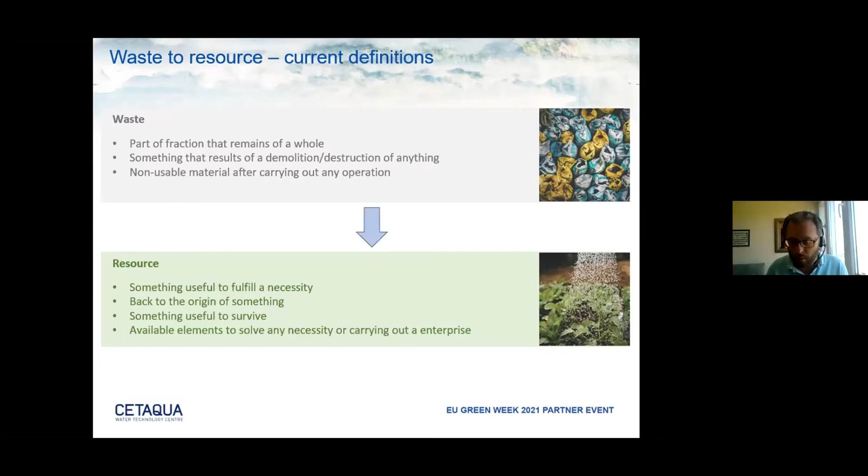As you know, waste is a fraction of a whole or a material that is no longer used after some kind of activity has been performed. This should be part of the past, so we have to make our small contribution in order to make this circular and in order to come up with resources. That is something that is useful in order to meet a need or a good or service that is required in order to carry out something in particular or make something become real. So we want to do this. We want to turn waste into resources for different purposes.

At Cetaqua, coming from Agbar, we were historically tied to the comprehensive cycle of water treatment. In Santiago de Compostela, the Agbar Center treats water from a comprehensive perspective, so that is our core business. These are the wastewater treatment plants. Little by little, we are moving towards the industrial sector, also placing an emphasis on wastewater facilities.

We are also trying to work on reclaiming water, stepping outside of the biological systems that normally prevail in water treatment and cleaning. So we do our best in order to use reclaimed water, that is to say water coming from households is cleaned, and then additional properties are put in order to use them for garden watering, for irrigation purposes, and also for street cleaning.

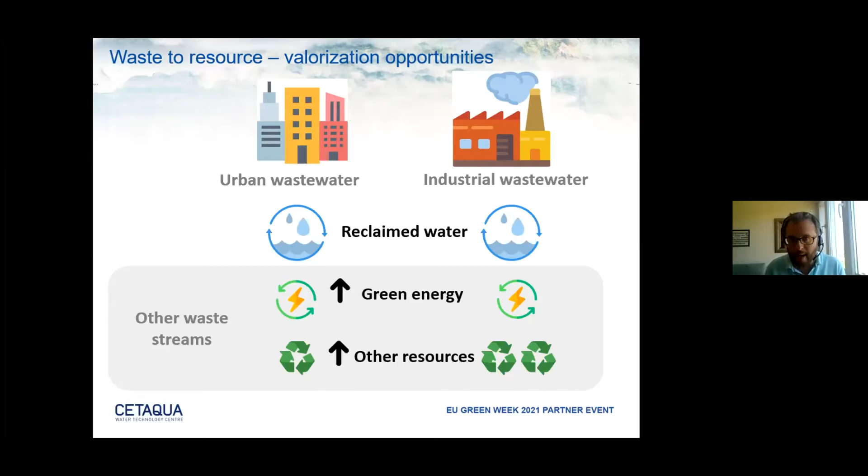We also do our best so that all the water coming from households can be caught in order to produce green energy by running some biological processes. So carbon can be turned into an energy generating gas. We also try to catch resources from solid urban waste. Martín from Códax before spoke about this already.

In this case, all the waste coming from these wastewater plants, that is to say the sludge, is subjected to an anaerobic process in order to obtain biogas, which is a source of energy that can be used either to produce electricity in the wastewater plant itself, or else it can be subjected to other processes in order to use it for other purposes.

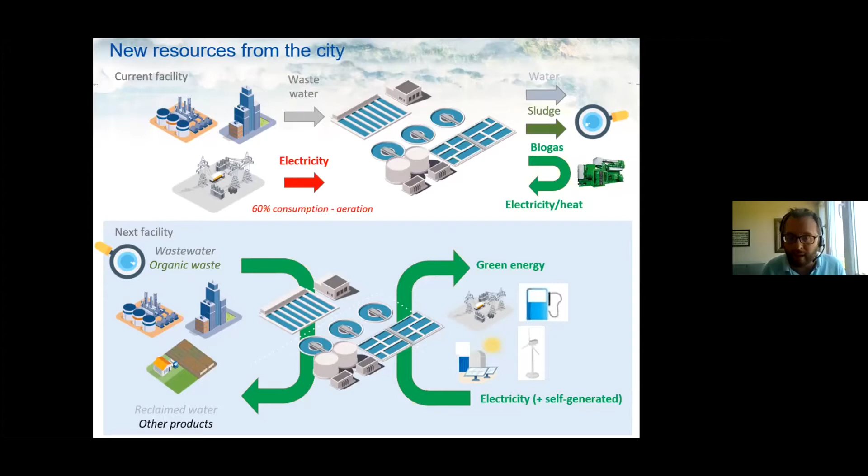In addition to carbon, we will also take into account nutrients that are found in wastewater. We will explore new ways of reclaiming phosphorus, for example, in order to produce fertilizers that require low application. That way we can use these fertilizers little by little in such a way that soil can better absorb all the fertilizer load without contaminating water layers, as it happens today with the application of traditional fertilizers.

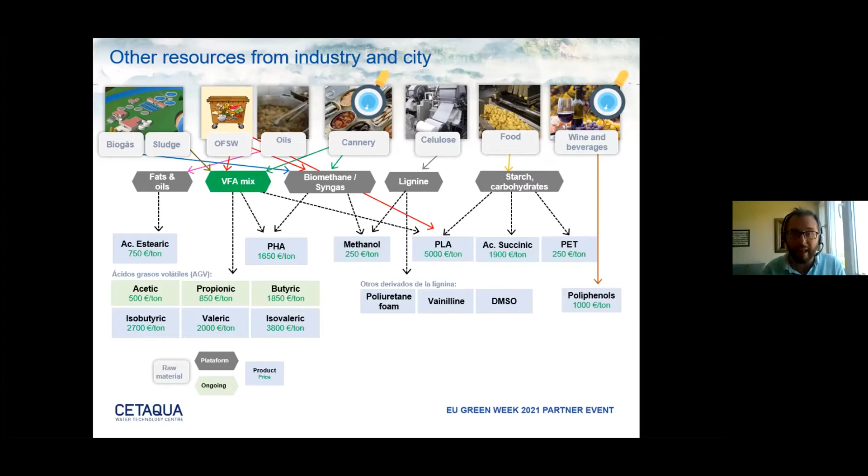As you can see here, there's a lot of theory behind reclaiming resources. There's a lot of scientific literature available on the matter. This is something that you can find in many databases. These are the different limits showing how far we can go. We know that we are not going to live forever, and therefore we need to make our small contribution by putting in place different initiatives in order to reclaim resources that today are considered to be waste. We can therefore keep them in the value chain, therefore reducing the exploitation of natural resources.

For instance, in the case of grapes, as we heard before, there are some compounds called polyphenols. The CIGAT Biofactory project is working on polyphenols by applying a separation physical process. We want to run an ultrasound process in order to obtain polyphenols that can be applied in different industries. For example, polyphenols can be used as a raw material in other industries, such as in the food industry, in the cosmetics sector, or in food and beverages at large.

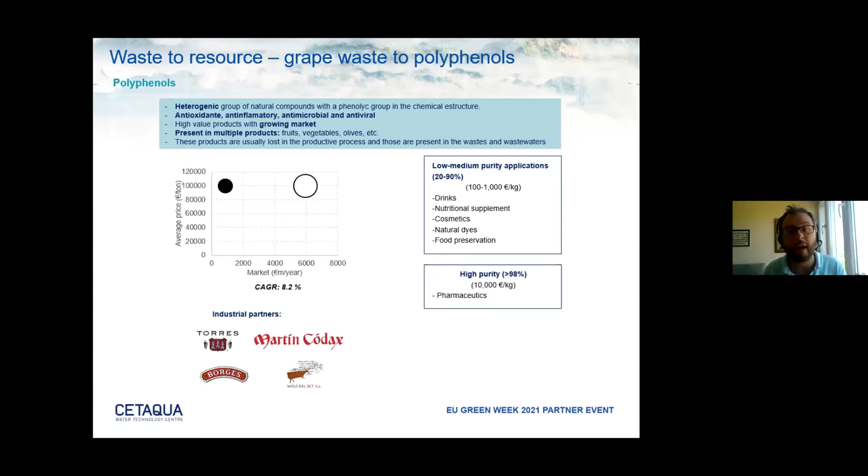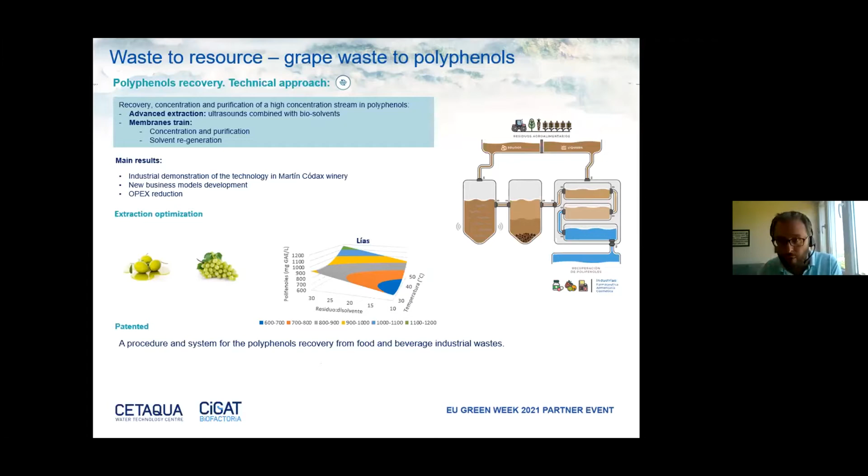At a low quality level, in the case of high quality polyphenols that could be used for pharmaceutical purposes, but that will take longer. This is a process where the viticulture waste is subjected to this process, to some ultrasound process. We use a number of membranes in order to obtain different degrees of purity of polyphenols. We can then use these resources according to the end users identified for this purpose.

Within the framework of the Conserval and the CIGAT Biofactory project, we will be able to obtain what we call volatile fatty acids, or VFAs. For example, we will be able to obtain acetic, propionic, and butyric compounds that today are found in the petroleum industry, even though they are similar to petroleum chemistry. We want them to come from waste sources after an anaerobic fermentation process. We want to obtain these acetic, propionic, and butyric compounds by using biotechniques.

For example, in the case of the canning and the dairy sectors, we can apply a fermentation process followed by a separation process that we are now working on. We can also use biomembranes in order to obtain purity levels that can be as similar as possible to these compounds that today are found in the petroleum industry. The aim, therefore, is to have VFAs that can be marketed in other industries, for example, to produce bioplastics, polymers, and also oils and fuels.

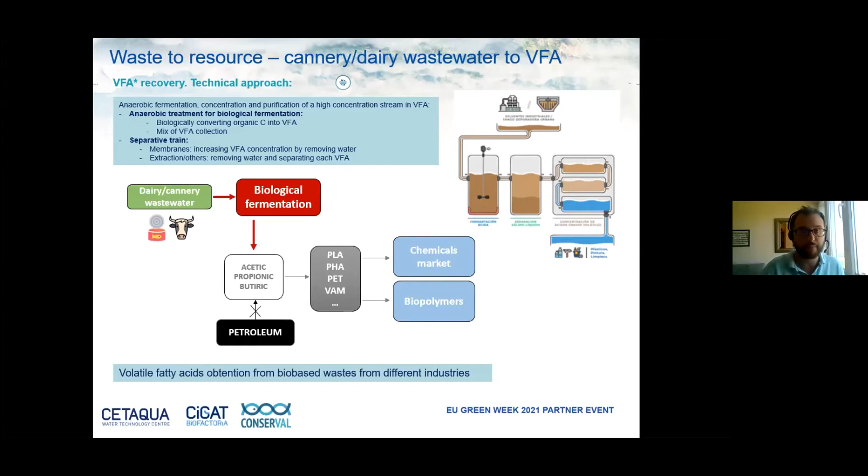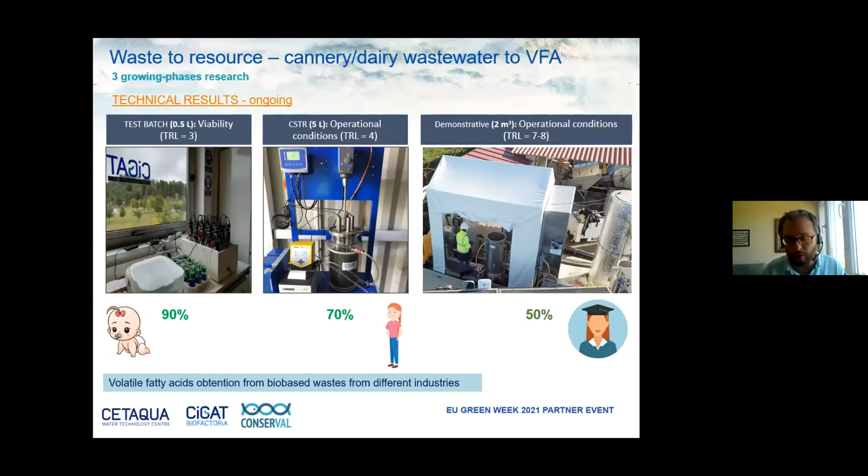What are we doing at present? We are still at an incipient stage. We are taking some baby steps. In the case of the canning and the dairy sector, we can turn VFAs up to 90% with different degrees of purity in each case. Now, if we move forward at a later stage, we are doing this at 70%, and at pilot scale, we are transforming carbon at a rate of 50%, and we believe that this rate could be further increased. So we will be able to twofold the amount of carbon in the form of VFAs.

Cetaqua is well acquainted with water-related processes because we have more than 150 years of experience in this area. We know that sludge contains many resources that are not being exploited. So we believe that right now this is not being managed, or it's actually being managed as waste, but VFAs are not being obtained. Therefore, we want to start using industrial wastewater, but using sludge coming from wastewater plants. We want to therefore create acetic, propionic, and butyric compounds. And we want to take one step further if possible.

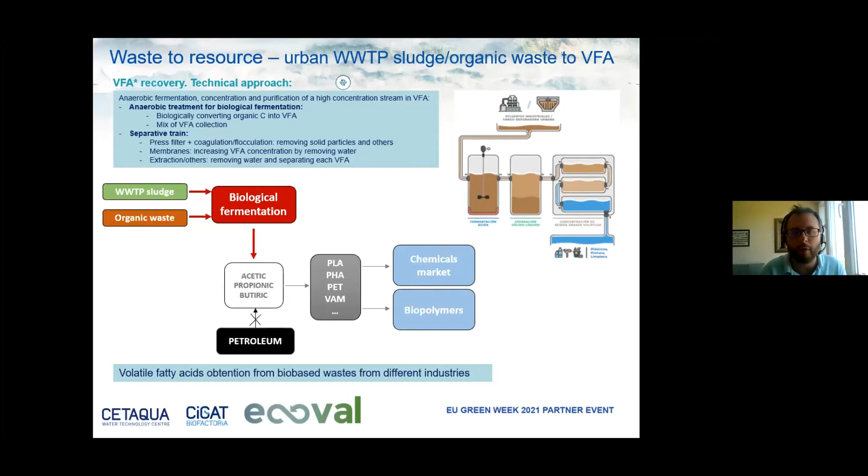In addition to sludge, we are also trying to aim at organic fraction solid waste processing. In addition to sludge, we would also like to introduce OFSW in order to increase the volume of VFAs. And that way, other industries will be able to obtain bioplastics, oils, and other consumer goods by using these resources.

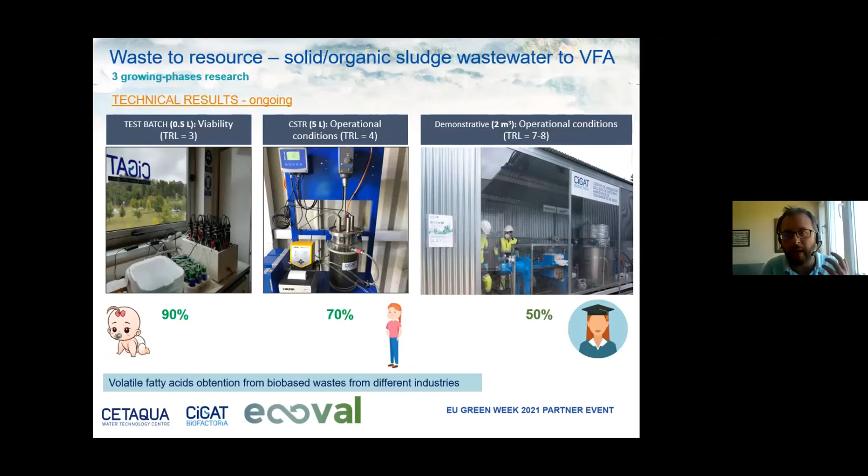We are also working on different experiments at a larger scale. We have also run some surveys and we have obtained satisfactory results. We intend to increase, therefore, the resulting volume of VFAs.

In closing, just like some of my colleagues said before, all this experimental work is in line with the EU strategies, Madrid strategies, and the government of Galicia's strategy. Everything we are doing is intended to foster the circular economy, putting in place all the actions that are being promoted by Brussels, Madrid, and Santiago, always in accordance with the European Green Deal,

and of course with an outlook on attaining the UN SDGs. And that's all. Thank you very much for your attention.

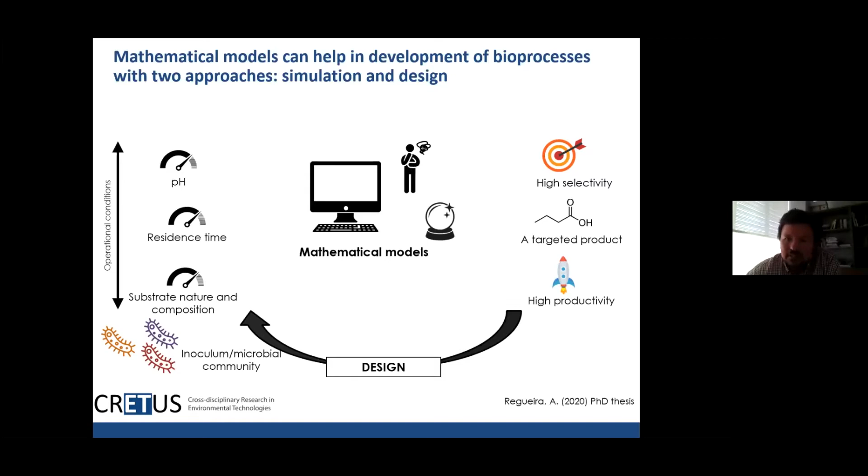Let's suppose that I want a high selectivity of a certain compound, for example, of butyric acid in a particular product. What kind of waste can I use to get there? Under which conditions should I work? I know that this may sound kind of rocket science, so let me try to throw some light by giving you a concrete example.

These are the VFA biofactories that Álvaro also mentioned during his presentation. This biorefinery or factory for VFAs is an interesting concept because it's highly versatile. It can be used with different kinds of waste with little separation. It's highly flexible. And this flexibility eventually leads to obtaining VFAs, for example, acetic acid, propionic, butyric acid, among others.

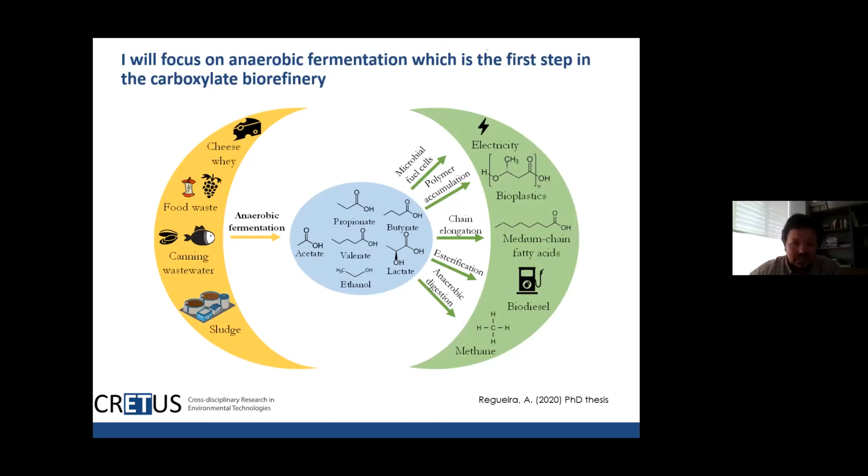And the second step is to turn those intermediate products, called platform products, into a whole range of products that could be very useful. All these are chemical products that can be turned into fuel generating products, for example. They can be used to produce bioplastics, electricity, among others.

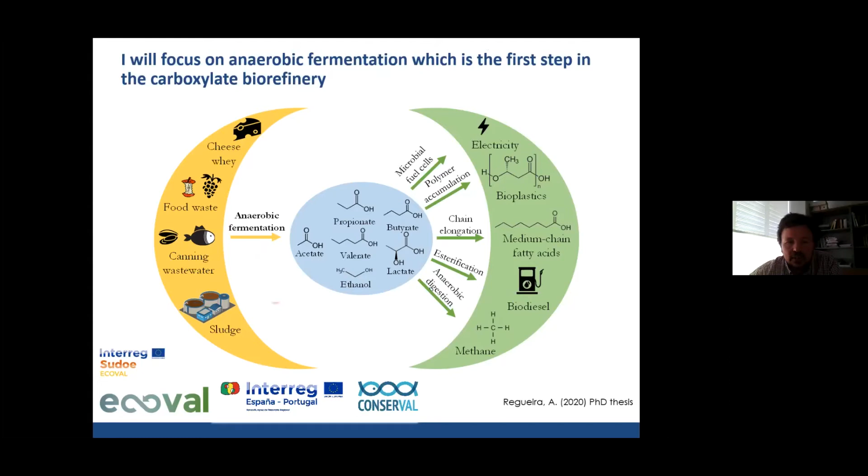At the University of Santiago de Compostela, in our center, we have been working for many years in designing processes for bioenergy. We are now working with Conserval and Ecoval. Álvaro also mentioned these projects before. So the first step in carboxylate refineries has to do with anaerobic fermentation in order to transform organic matter into these end products. So how can we apply mathematical models in order to obtain VFAs?

The first step is about anaerobic fermentation that leads to VFAs, but sometimes it's very difficult to predict. It's always going to be a mixture, and it's difficult to see which compounds will prevail, if any. Besides, these prevailing compounds may vary to a great extent and not in an obvious manner according to the substrate and the operating conditions.

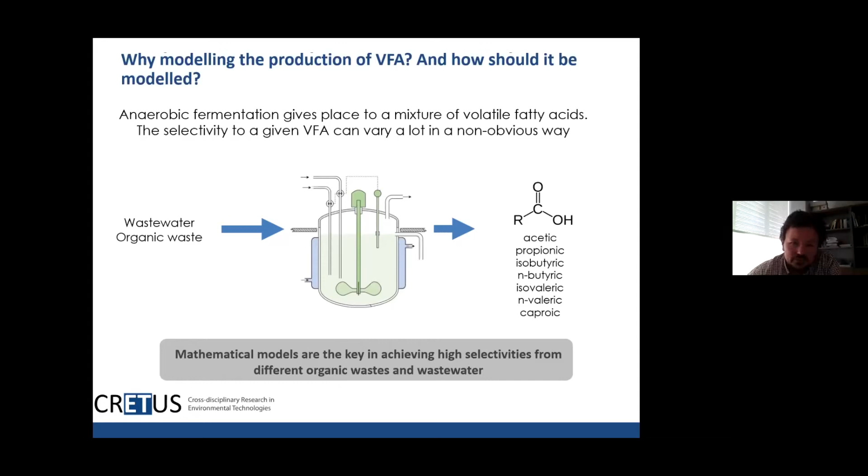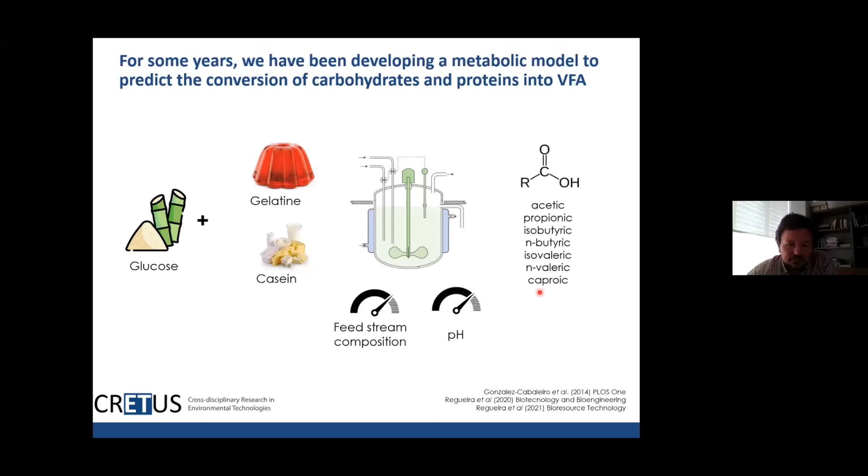We have worked to show that mathematical models can be key in predicting the products that could eventually be obtained with high selectivities in order to obtain products from recovered waste. For many years, we have been developing mathematical models at metabolic level in order to turn mainly carbohydrates or waste containing high levels of carbohydrates and proteins into VFAs. So this kind of waste eventually results in VFAs. These are the intermediate VFAs that we are interested in.

So what are these mathematical models like? These models are concerned with a number of biological processes performed by certain microorganisms. So they describe a number of metabolic transformations inside the cells of these microorganisms. So this shows how the different substrates get into the cell.

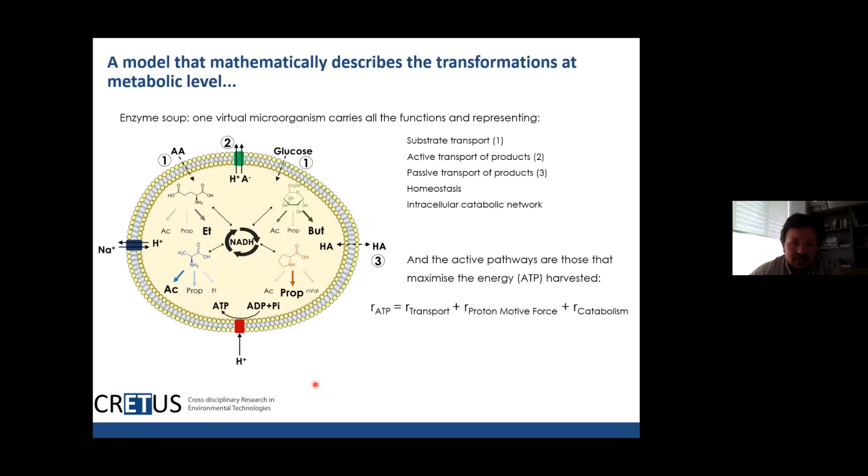So how can we predict the compounds that will prevail in these transformations? Well, we can apply a number of biological fundamentals. We know, for example, that in fermentation processes, these products are the ones that will allow cells to grow more or obtain the greatest amount of energy possible. As I said before, this can be depicted mathematically, and eventually it enables us to predict the main fermentation products.

This chart, for example, shows on the horizontal axis at the bottom the gelatin concentration in the feed. Here we had two residual flows, one that is rich in proteins and another one rich in carbohydrates. 100% of the flow here would be rich in carbohydrates and the other one rich in proteins. If we change the proportion of both flows or streams and according to the pH under which fermentation is performed, we can obtain different

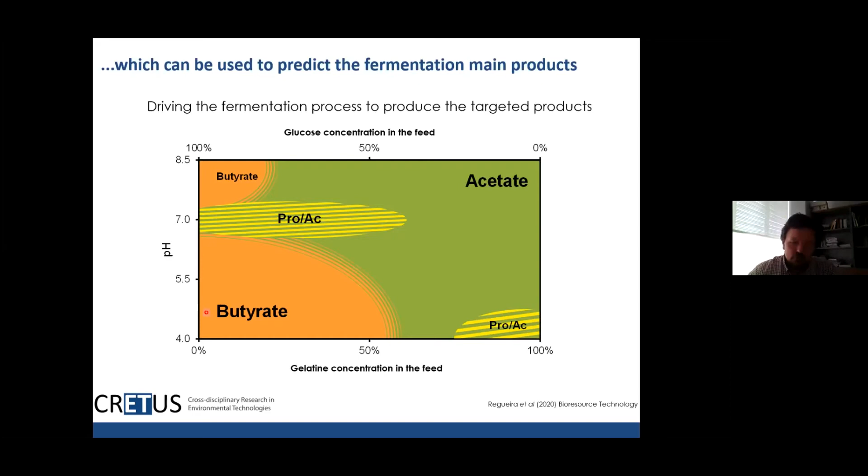areas with either one VFA prevailing or another. We can have butyric acid, for example, or else with a moderate or high pH, we can obtain other results. If, for example, we want more acetic acids, we can start using other streams or flows using high levels of protein. So, of course, this can also be translated into more quantitative calculations.

Within the framework of the Conserval project, we want to predict not only how VFAs are produced, but also how salinity in the wastewater of canning facilities will affect the production of VFAs. Therefore, we need to expand our mathematical models, taking into account the metabolic transformation carried out by microorganisms in their cells in order to face this salinity or salt accumulation that sometimes can be tough on microorganisms.

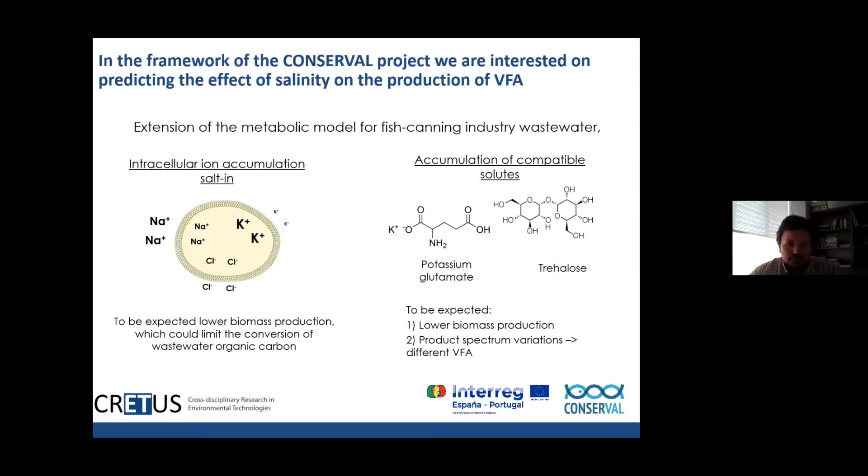Here we have represented different behaviors, mathematically speaking. For example, there is an adaptation strategy that is called salt-in. This means introducing other types of salts, like for example potassium ions to compensate the sodium ions, or else the accumulation of compatible solutes to allow cells to withstand salinity better.

How can we tell, or how do we identify the strategy being followed by each cell? Here we're trying to develop bioprocesses by applying mathematical models. So we will have to run experiments at the lab in order to validate all these models.

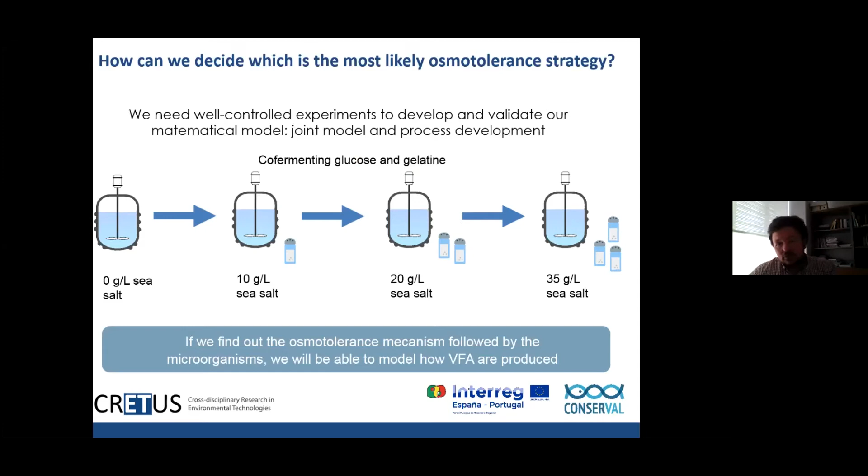We have some reactors used for fermentation, for example, for carbohydrates and proteins with different salt concentration levels, and that enable us under controlled conditions to learn which mechanisms are applied by microorganisms to see how they withstand salinity and how this affects the products that we are seeking to obtain. So the salt-in strategy, for example, will not alter the VFAs that might result. That's quite interesting. However, the number may be lower at the end, or they may be produced more slowly.

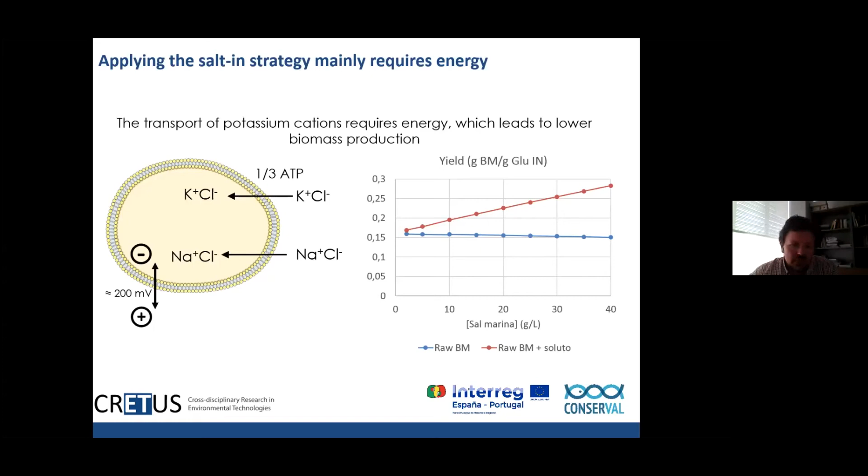We also know that producing a de novo compatible solute, these may be interesting compounds. For example, there are some products that can be used for cosmetic purposes. This, however, requires a high level of energy consumption by cells, and therefore this may lead to a reduced amount of VFAs.

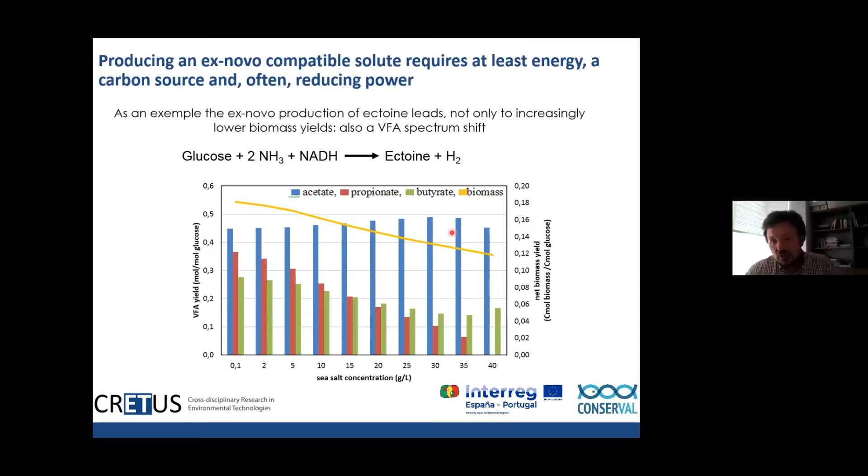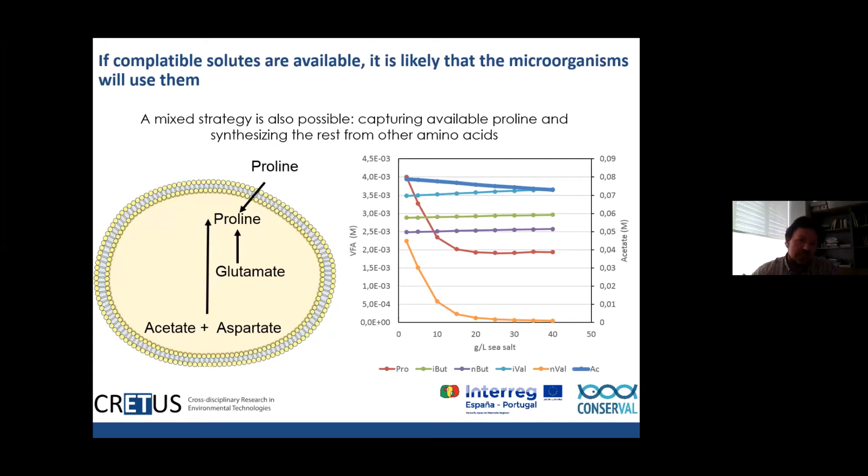Therefore, if the cell is producing this compatible solute, this happens with glucose, for example, we will go from a fermentation of this kind, that is acetate, propionate, and butyrate, to another one that will be more acetic. So we can have intermediate situations as well. We are using compatible solutes that can also be substrates, so the change of spectrum here will be different.

By bringing all the experiments together and running our models, we can do some predictions as to what is going to happen. And how do we use this to develop bioprocesses? As I mentioned before, we have simulation. We can screen the different wastes and the simulation conditions. We can try out different wastewater material from treatment plants, or, for example, organic matter from industrial facilities, or solid waste.

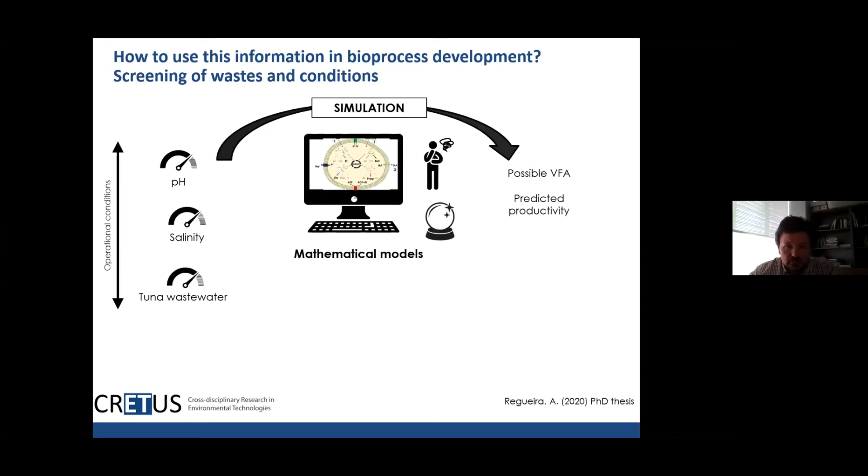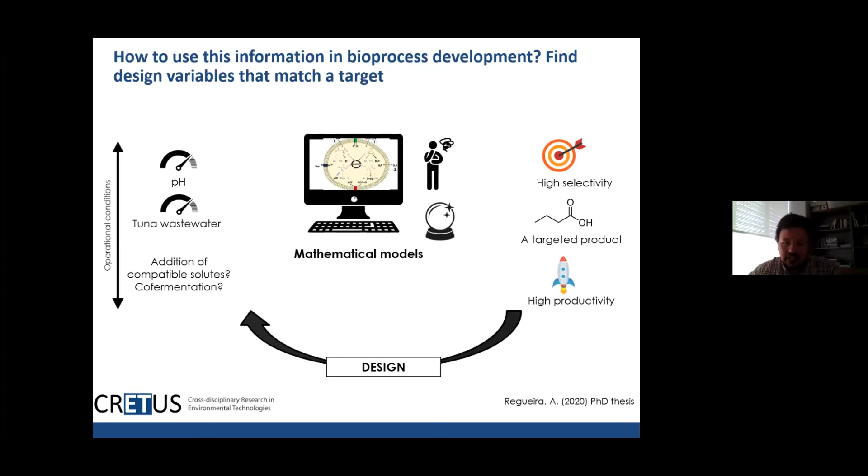Alternatively, by choosing a certain product and certain selection criteria, we can also decide how we can better mix different waste or residual sources, or whether we have to add a chemical compound that can act as a compatible solute so that microorganisms in canning water can withstand salinity. Perhaps we have to use some kind of product with a high content of viscera. So by developing these models, we can produce much more effective processes contributing to the circular economy.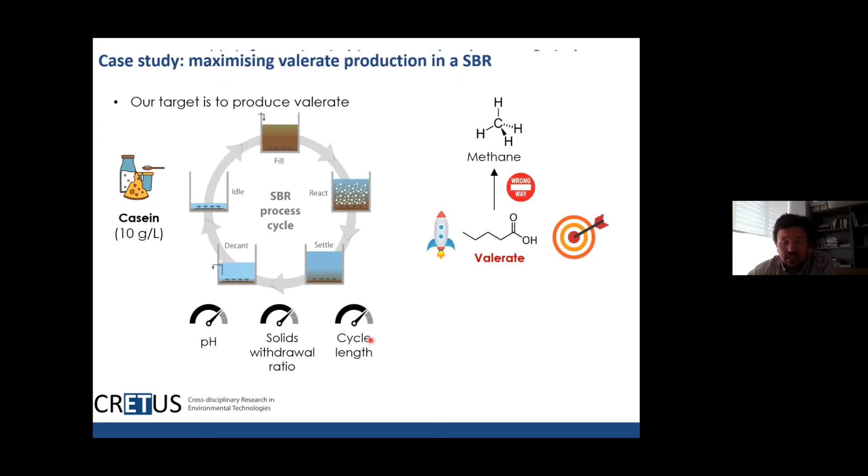Well, according to the goal we pursue, here you can see the cycle length and the solids withdrawal ratio. If our goal is to maximize selectivity so that we can turn waste into VFAs mainly, we will have to work at short cycles, at short withdrawal ratios, and with a pH near 5, where we have the maximum selectivity possible. However, if we have a different productivity aim, we are going to also work at short solids withdrawal ratio, but this is kind of risky because one portion can turn into methane if we deviate too much.

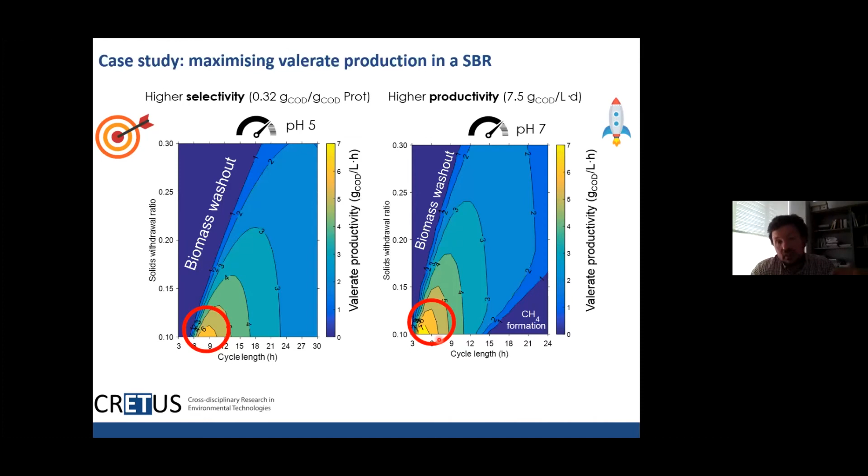Productivity, however, in this case would be higher in order to obtain this particular fatty acid. This is just a biological model with some inherent error. All the same, this might help us to check the pilot plant results to reduce the range of the variable.

Design variables and therefore develop bioprocesses and get closer to attaining the goal set. In closing, I'm certain we all know that developing bioprocesses is tough, but mathematical models can make it easier. In the case of the carboxylate biorefinery, it's quite flexible to turn waste into energy. Models can help us improve selectivity while providing better understanding and narrowing down the operational space, but experimental work will be required for the relevant variables and also in developing processes.

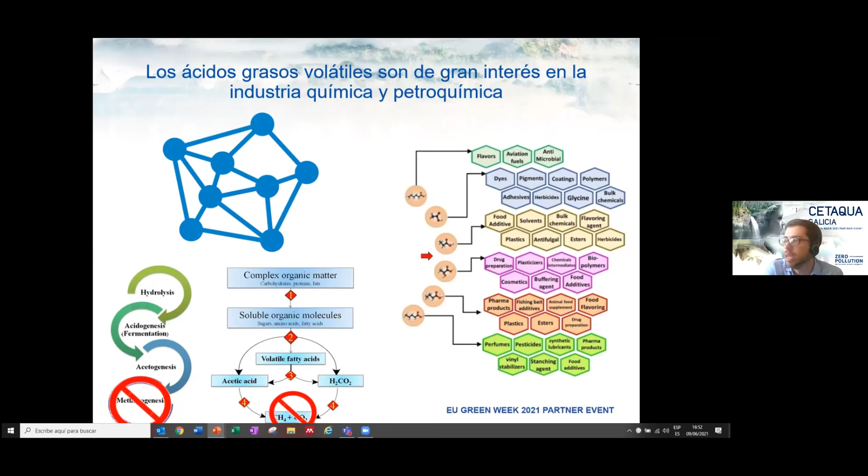We have as goals to continue with these models in order to implement them into other types of waste and real waste, such as sludge, urban bio-waste, the canning industry waste, that have different types of organic compounds. So we were focused on how to produce fatty acids, selectivity, productivity, etc.

But I'm going to focus now on what happens from that point. What happens once those fatty acids are produced and fermented? There is a significant difference with the conventional process of anaerobic digestion. It is a process with 3 stages: solid, liquid and gas, and we achieve an in situ separation of the product. Once the organic substratum has been turned into biogas, this biogas is separated from the medium where it is produced. For example, in a water treatment plant, this is used to generate

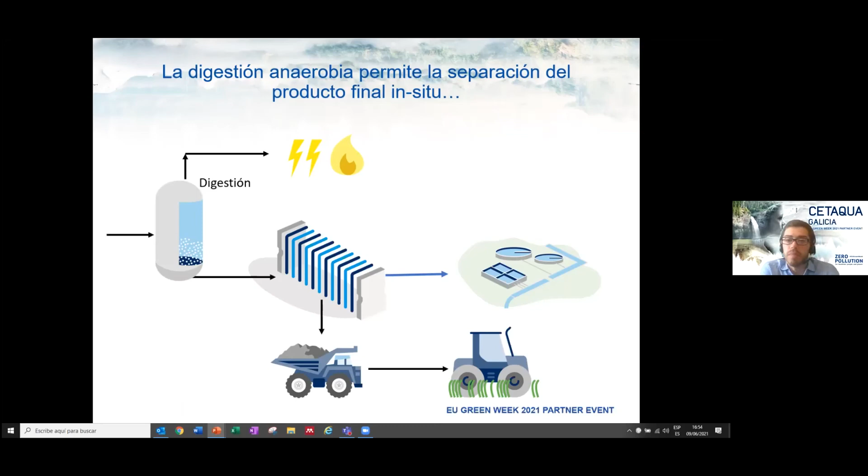electric or thermal power for the needs of the water treatment plant. Then the solid or semi-liquid part of the digestion can be dehydrated. The liquid one goes to the plant, and the solid one is used for agricultural purposes like fertilizers. So the entire process is used.

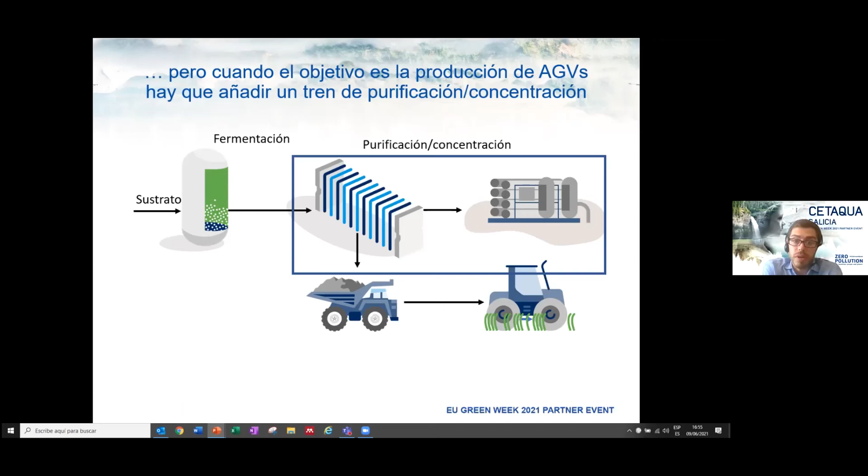And when the objective is the production of VFAs, we need to add something, because that in situ separation without applying any types of energy for this separation has a different nuance, and this separation can be complicated because we are talking about a fermentation of sludge or bio-waste where we have a concentration of acids of 5, 6, 7, 8, 9, up to 10%. So in 1 ton of that output from the fermentator, we can get still 900 kilograms of water. Separating that water is not easy.

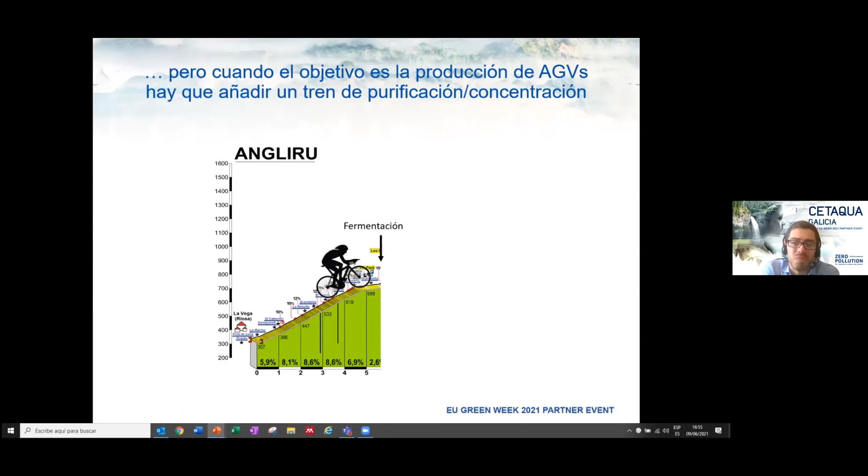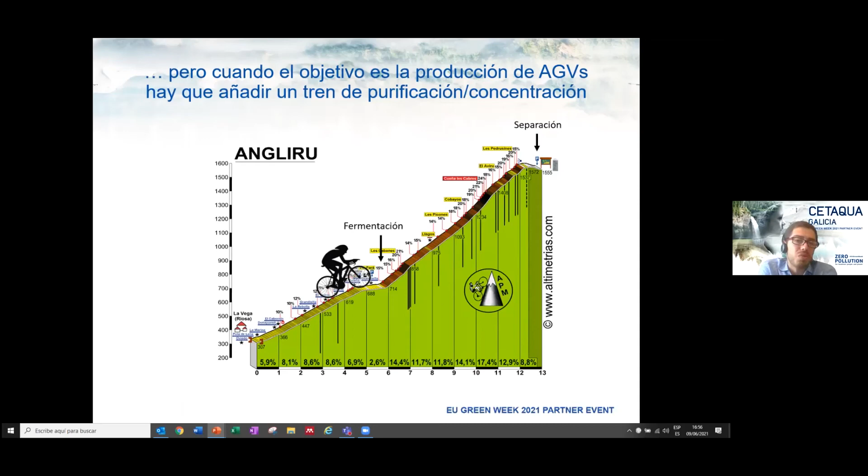So to give you an example, maybe you like cycling when you are going up the mountain and you look back and say the part that I already covered looks easier. But controlling the fermentation and stopping these reactions on the acids in order not to reach methane could be the easier part of the process for different reasons, for instance because we are already there, so what we have already done looks easier. But I'm going to be quick, I don't want to bore you with technical details.

The first difference with a biogas system could be that the dehydration of the sludge or bio-waste can be a la carte. We get a solid stage with the waste that was not transformed, with the biomass that transformed it, and a liquid part with these VFAs and other types of compounds. How do we achieve this separation to get a solid and liquid stages?

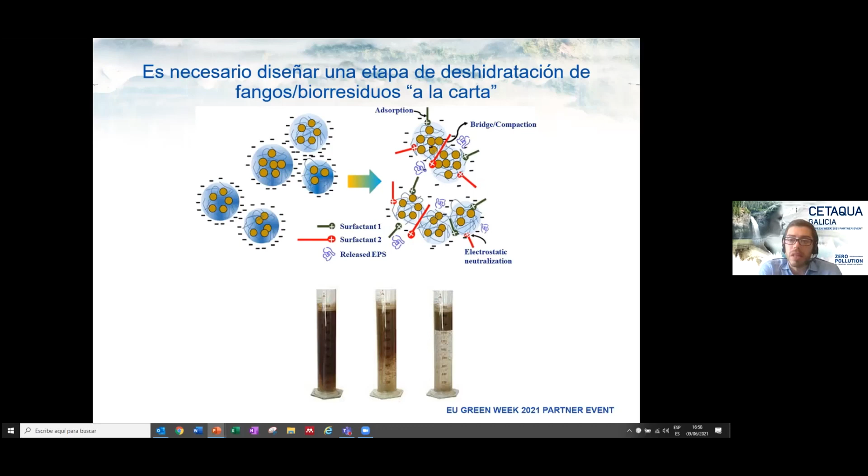By adding chemical products such as surfactants or flocculants that interact with the negative parts that surround the sludge, the sludge comes together and separates from the rest. But the chemical products usually used on sludge management not only put together this solid part, but also due to this electrostatic neutralization, they also take part of the soluble compounds. So what we found is that conventional chemical products take with them those acids to the solid part, and therefore generating acids, and if we can't separate them on the first stage, it makes no sense.

So luckily there are other compounds more specific, and it's true that the precipitation of these acids is not prevented 100%, but we can reach 85%, 90% of separation on liquid mediums. So we are talking about a concentration of acids at not more than 10%, and the final users like Repsol, as Carolina was explaining, showing interest on new products, the quality criteria need to be a purity of more than 95%. So we need to add stages to concentrate and purify these acids.

And I think that the technological development here is a little bit slow. Then in the fermentation stage, we know that if we do a series of things with some parameters, we get fatty acids. Sometimes we don't know why, but we have other technical alternatives.

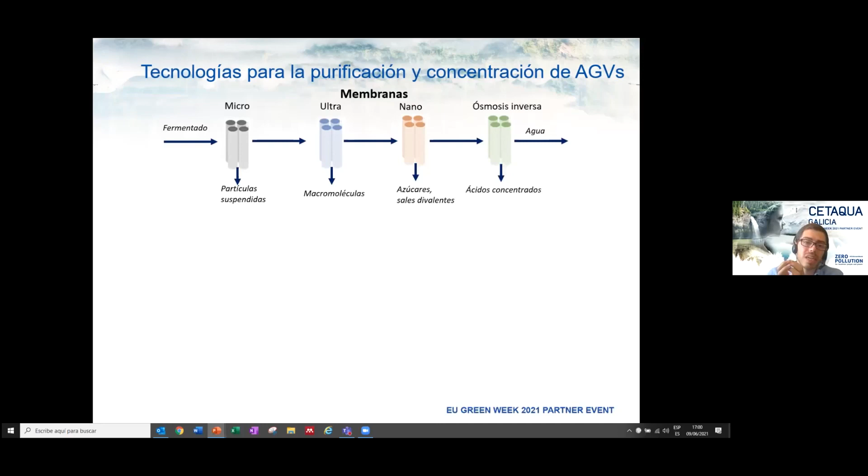One of them would be the application of micro, ultra, nano, and inverse osmosis membranes to eliminate some compounds like suspended solids that were not eliminated during the precipitation stage, ultra and nano filtration for smaller compounds to be separated from the acids, and then an inverse osmosis process to withdraw the water from the system. This technological trend is being promoted, but the results right now show that we cannot reach the necessary concentrations to market this dissolution of volatile fatty acids.

Within the Conserval project, we are focusing on adsorption and desorption. The liquid from fermentation is in contact with a surface that, given its chemical and physical characteristics, keeps or retains these VFAs, and the rest of compounds are left, I mean they can go through it. Once this surface is saturated, depending on the surface, with these solutions, ethanol, these acids are separated and recovered.

And then a third example that we are promoting within the Ecoval and Conserval projects, we have extraction liquid distillation. An example for less technical people here would be when we mix water and oil, they are not mixed, they are separated into two phases. So this technology has an extraction part where we use an organic solvent that takes with it the volatile fatty acids to this organic phase, which could be the oil, and we obtain a product that is not interesting, which would be the water that was with the VFAs.

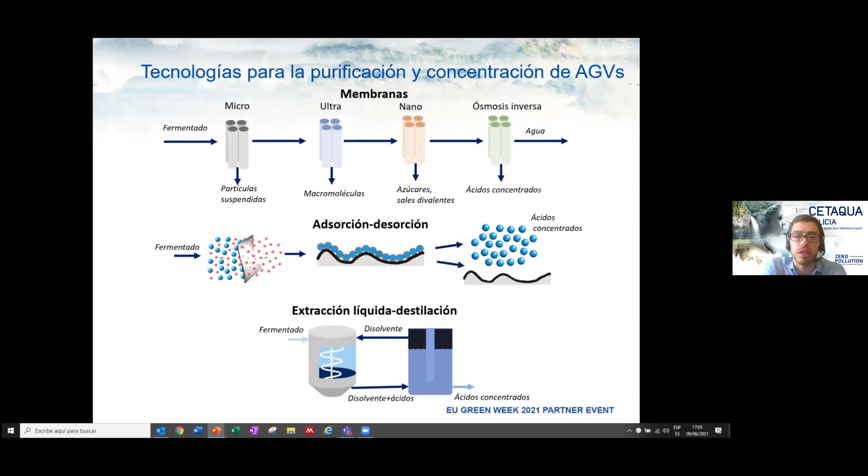It seems complicated in the short term that we will be able to separate individually the different acids produced, but we are quite optimistic about it. We can get a product with concentrated acids, but this proportion of acids in the final product will be the proportion obtained in fermentation also. So I would like to stress the importance of metabolic and mathematical models to focus the fermentation towards a specific process depending on the market needs, the business models that you have.

So this would be my presentation. I just wanted to give you an idea. I think the technological development has always been focused on fermentation especially, but there are other borders, technical borders that we need to overcome in order to market these products. Thank you very much for your attention.